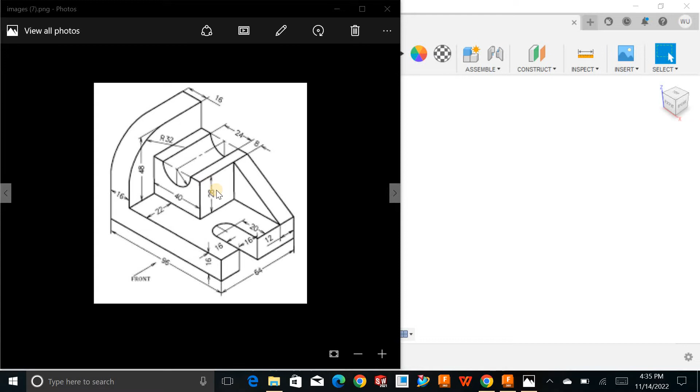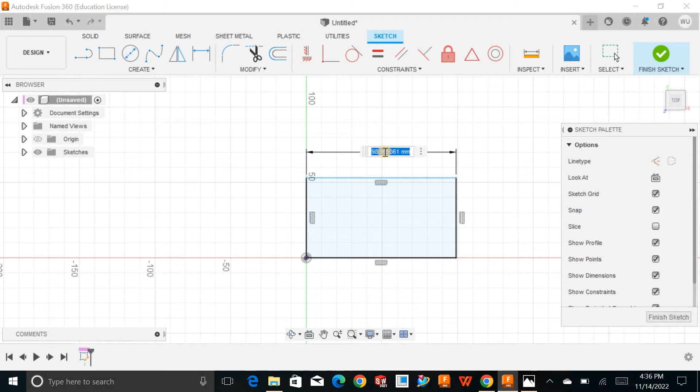Let's try to make this part. The dimensions are given, so let's start the part. Click on sketch, choose the horizontal plane, add a rectangle, go for sketch dimension, add dimensions of 96 by 64, and hit OK.

Extrusion becomes 16, and hit OK. Next we will add this flange of thickness 16 and extrusion 48.

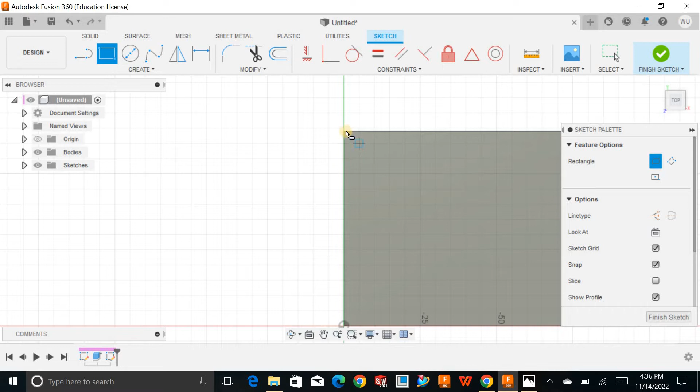Choose this face, sketch on it, go for corner rectangle, go for dimension. This becomes 16. Finish the sketch. Select the region and go for press pull. Define the height.

Next define this radius of 32. Go for fillet, choose this edge and define 32. I will hit OK. Next this region, the width is 40 and the length becomes 64 minus 22.

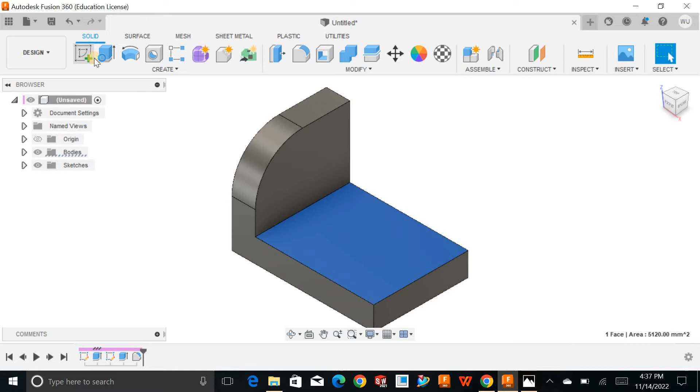Choose this face, go for sketch, draw a corner rectangle like this, go for dimensions. This becomes 40, and from here till here this becomes 22. I will hit OK.

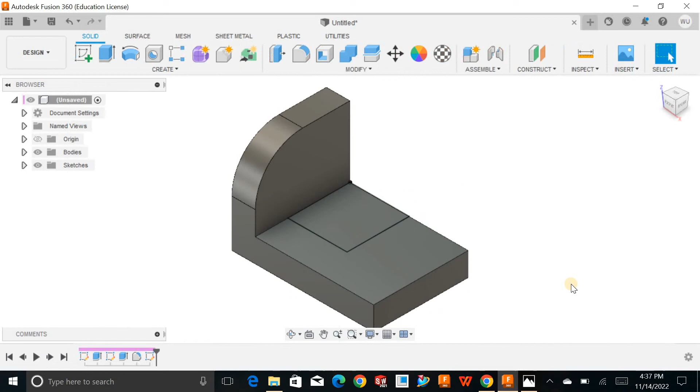Extrusion becomes 28, and hit OK.

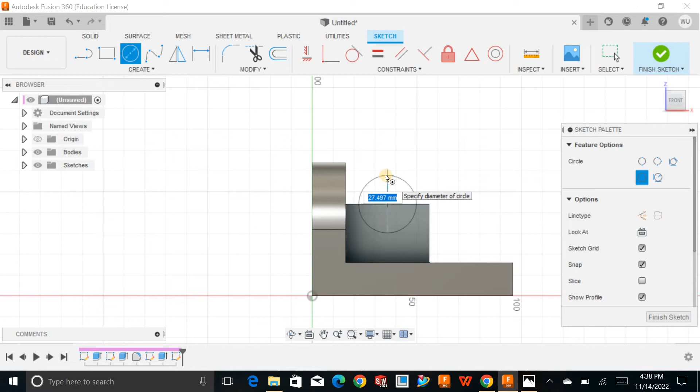Add the circular cutout. For that, choose this face, sketch on it, add a center circle like this, define the diameter 24, and hit OK.

Go for extrude, select the region and cut this. See?

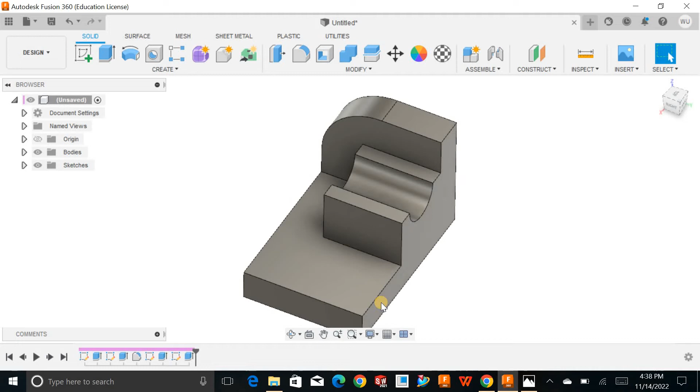Next we will add this rib. For that I will choose this face and sketch on it. Go for line, start from here, somewhere here, and like this, and finally close the sketch.

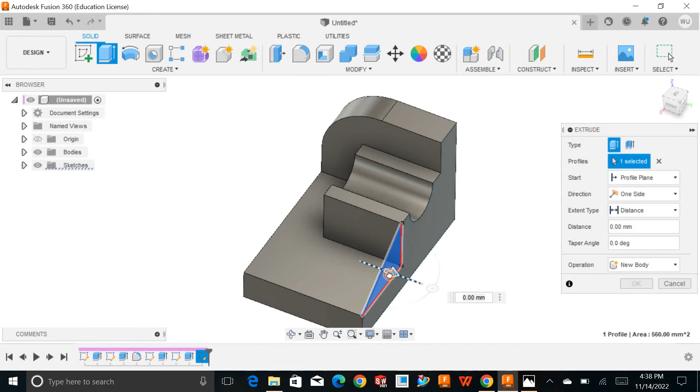Finish the sketch. I will go for extrude, choose this region and define the thickness, which becomes 12, and define minus 12, and hit OK.

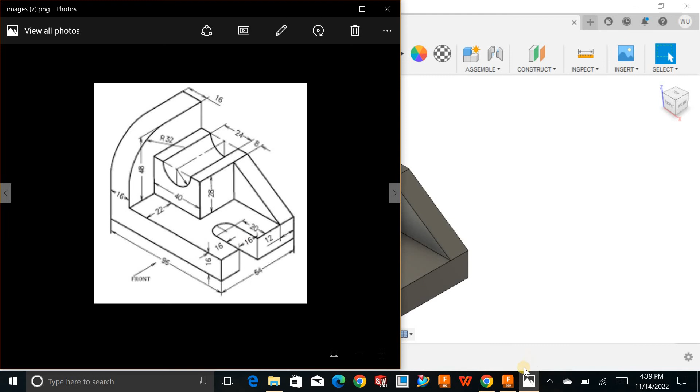See? Next only this slot remaining. For that I will select this face and sketch on it,

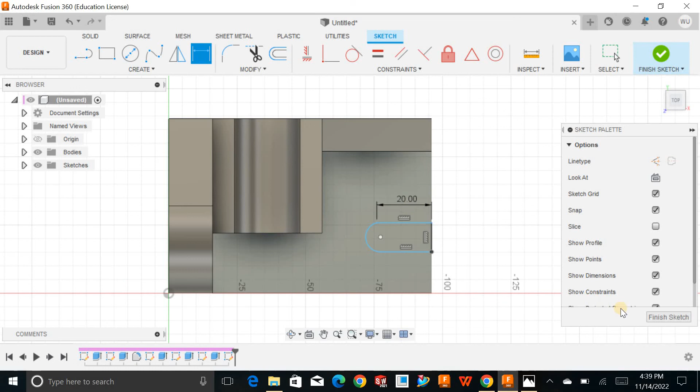go for rectangle something like this, add a circle of somehow like this, clear the unwanted portion, and now create dimension, and the dimension becomes, this one becomes 20, and you will finish the sketch.

Go for extrude, select the region, make sure to create a cut, and just make sure to drag it downward, or you can select all and hit OK.

Home this to reorient, go for appearance, choose bodies, and this time I will go for mirror and drag this color. Close it for now. See, you have done with the object.